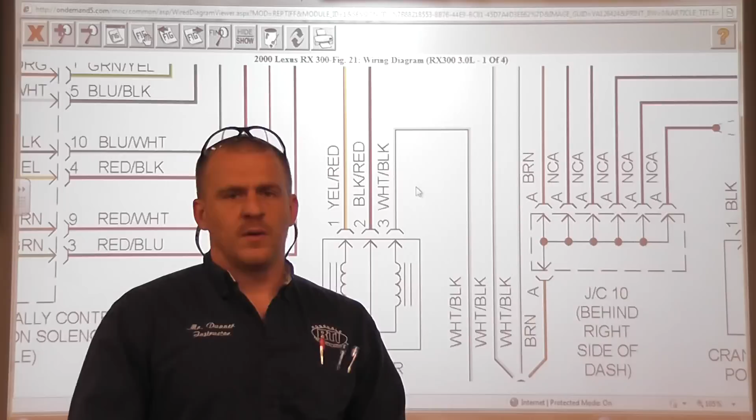Okay, this is part 2 of our 2000 Lexus RX 300. This vehicle comes in and doesn't start, with all the symptoms of low compression. Long story short, we have an idle air control problem, so we're going to address the idle air control motor on this vehicle.

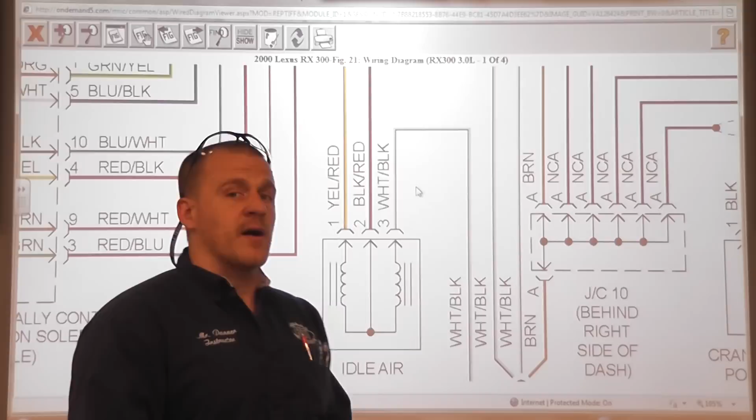First place we're starting is a wiring diagram, to see what kind of idle air control motor we have. This is a 3-pin idle air control, as it shows right here. There's my idle control valve, top rear of the engine, 3-pin, and what we have is this white-black wire that goes right to a ground splice, so this is constantly grounded.

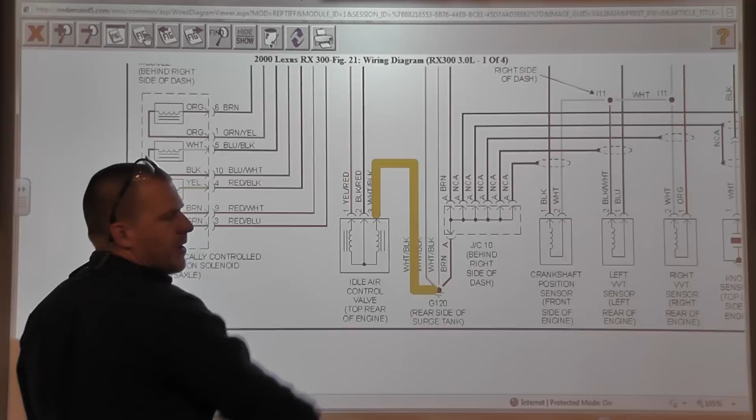I've already tracked this black with red right here. That is a 12-volt feed from the EFI main relay. So we have a constant 12 volts on this wire, a constant ground on this wire, and if you look at this wiring diagram, that means that this coil right here is constantly energized.

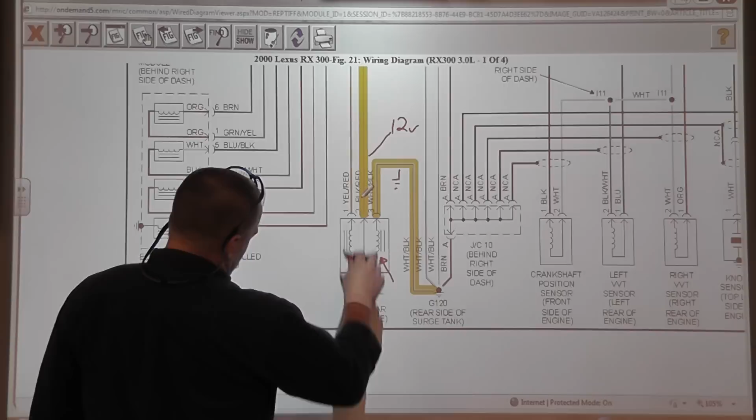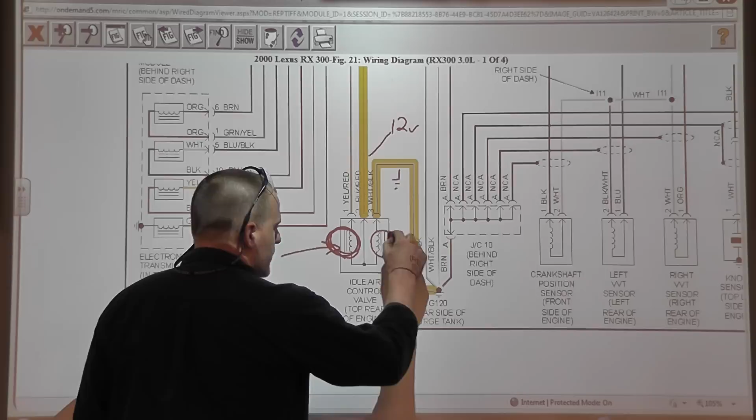The other coil, this yellow-red wire, goes to the computer and it is a pulse width modulated ground on that yellow with red wire. It's a pulse ground. So the way this valve works is we strengthen and weaken this magnetic field. This one stays the same all the time, and that's going to cause this type of valve, which has a butterfly inside of it, to rotate left or right based on these two magnetic fields.

This is the way this one's working. Not all Toyotas are designed like this. Some of them actually had this one also pulse width modulated, so we would control this one and this one, but in this case it's not like that. Still, very similar in construction.

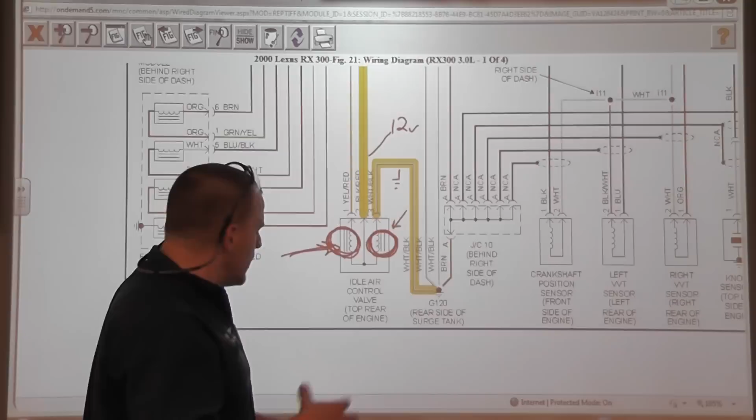Again, inside of it we're going to find this plate, and the way it moves either this way or this way is going to open up that air passage, based on the strength and weakness of that magnetic field. So what we want to do when we do our checks with this - and it's really important that you understand a little bit of theory behind this -

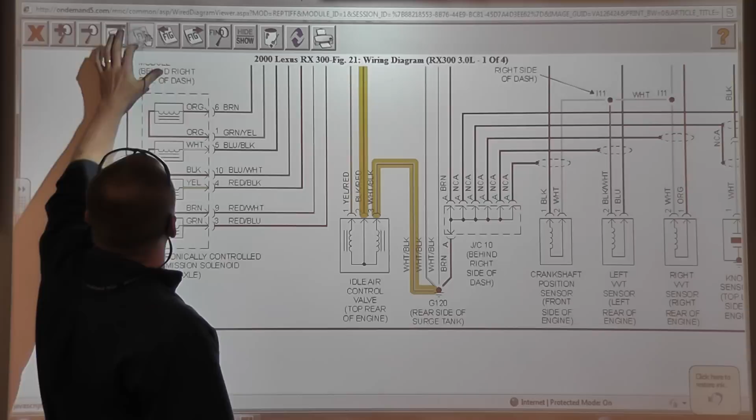is we want to do our voltage checks. And of course you can't do voltage checks on something unless you know what the voltage should be. What do we want to see on pin 2? We want to see battery voltage, between 12 and 14 volts with the engine running. We're going to do this stuff with the engine running. So we want battery voltage on this black-red wire.

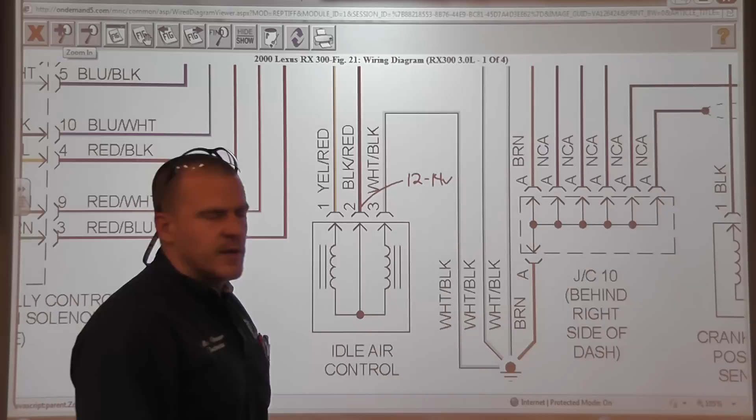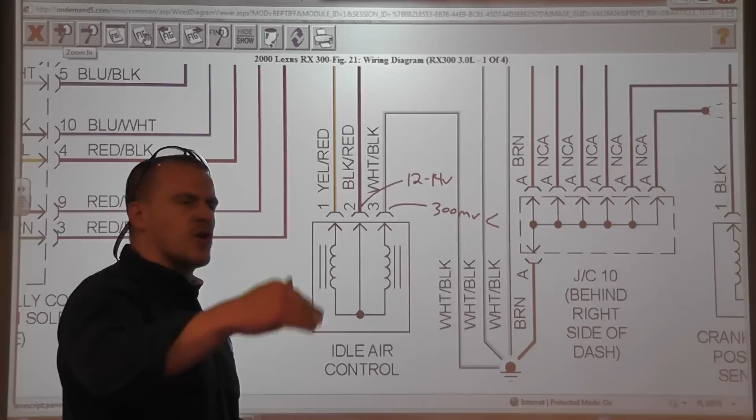And then on the white-black wire, I'm not sure exactly what would be tolerable here, but a few hundred millivolts at most on this ground - maybe 300 millivolts or less, I'd be happy with that. The reason I'm giving a little bit higher ground voltage is a little bit more current flow on this circuit, so I'm okay with that.

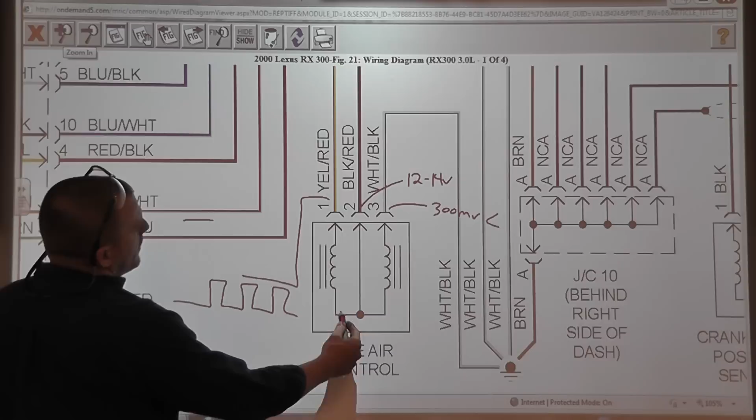Low voltage on the white-black, 12 to 14 volts battery voltage on the black-red, and then what we want to see on this yellow-red is some type of square wave, pulse width on-off signal. I'm not sure exactly right now, I've never done one on this car. It might have some spikes to it.

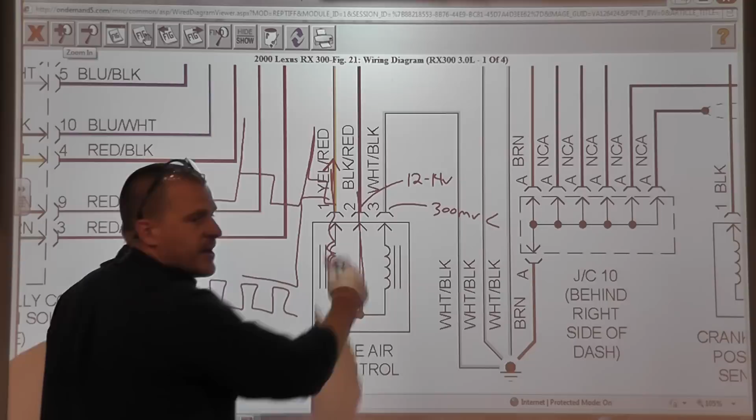Those spikes would be when it's on - the voltage is low because it's ground side switched. When it's off, the voltage is going to be high. You're going to have voltage come through here, through the coil, and the voltage will be high coming out of this yellow-red wire unless the computer's grounding it. So maybe voltage low, and then you might get a spike afterward because of the design being ground side switched. So we might actually have a square wave with spikes on it, and that could be normal too. Those spikes would simply be the collapse of the magnetic field when it's turned off. Again, I don't know exactly what this one's going to look like.

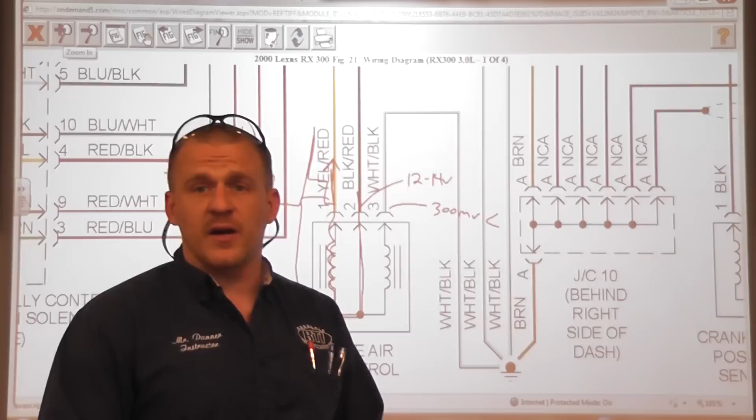That's the test we're going to do. We need to confirm that the computer is able to control this valve before we pull the valve off and say that it's mechanically stuck, which is the common problem. So that's what we're going to do now. We're going to go to the scope and pull up all 3 channels at the same time - we have that luxury. Maybe we'll do it like that. Put it back up on the screen. Okay, go ahead, pause.

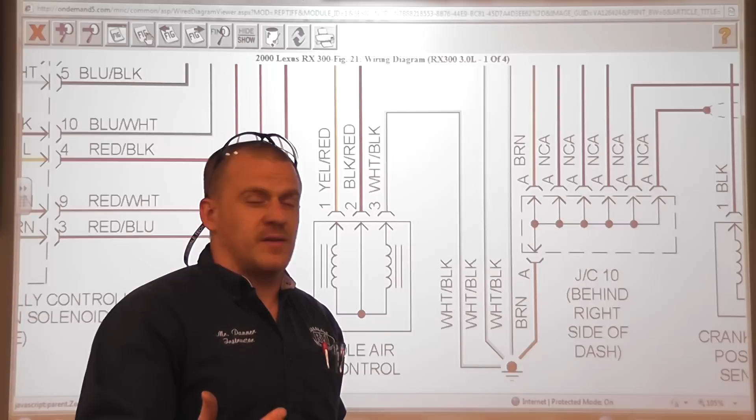Okay, I want to warn you guys of one thing. I said we're going to look at all 3 at the same time. This really is a safety concern with the engine computer doing this.

I'm using insulated T-pins, and actually I got these. Where's that kit? Can I see that? These are from Pico. These are electronic acupuncture probes, and they're insulated. So it's basically a T-pin, but they're insulated.

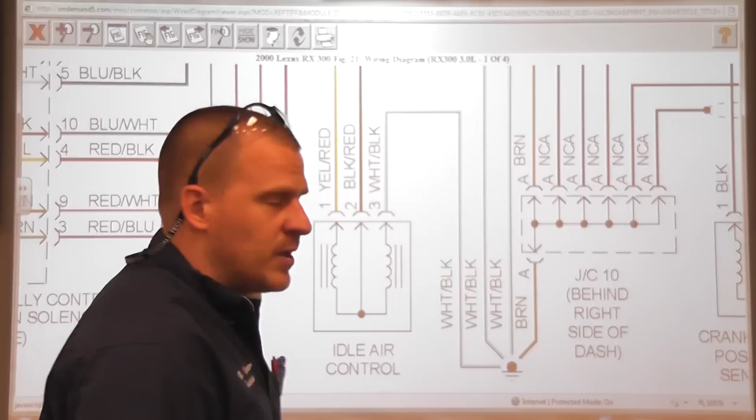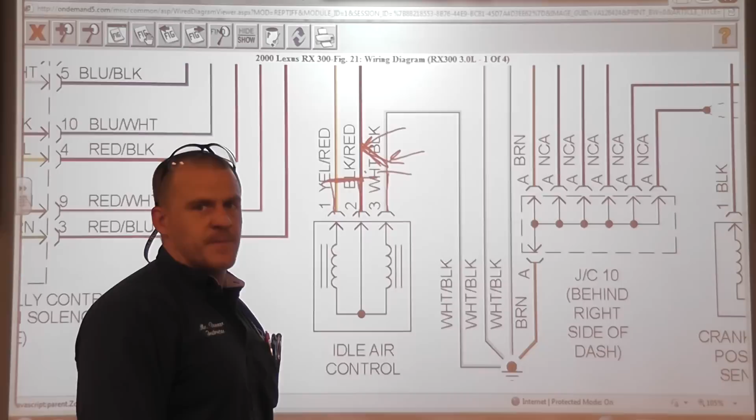The reason I'm using these is because we're going to do all 3 channels. If I use 3 T-pins and these things touch each other, remember that this is battery positive, this is a ground. If these 2 touch each other, I'm going to blow the fuse. If these 2 touch each other, my battery positive and my ground side switch computer driver, I'm going to cook the computer.

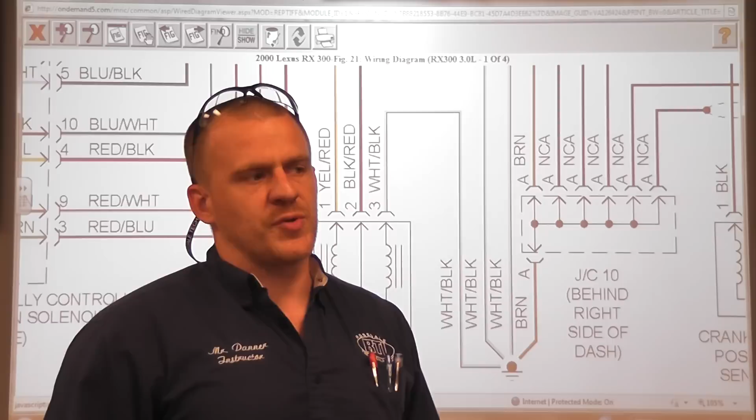So we need to be extra careful about what we're doing with T-pins. I know that I stress to never double T-pin a solenoid, which is what we're about to do. I'm doing it because I want them all in one picture so I can show you how the thing operates. I'm not suggesting in the field that you do all 3 at the same time. Do them one at a time. You only need a single channel. Check your power, check your ground, check your control signal. Don't do them all at once.

Okay, pause that for me.

All right, the tool we're using for this test is the Picoscope 4000 series. And I'll give you a shot under the hood, show you where our connections are at the idle air control motor.

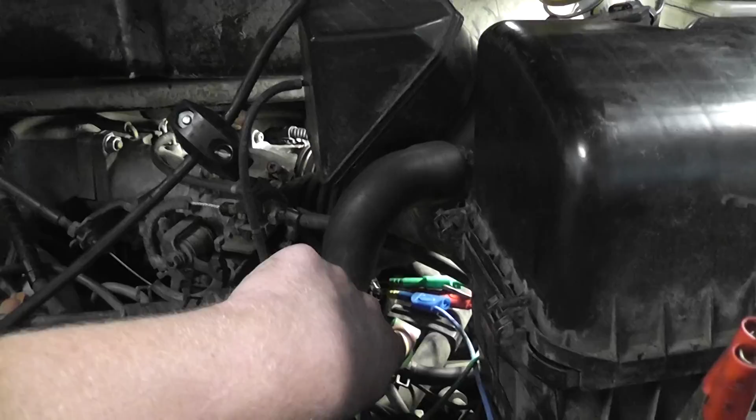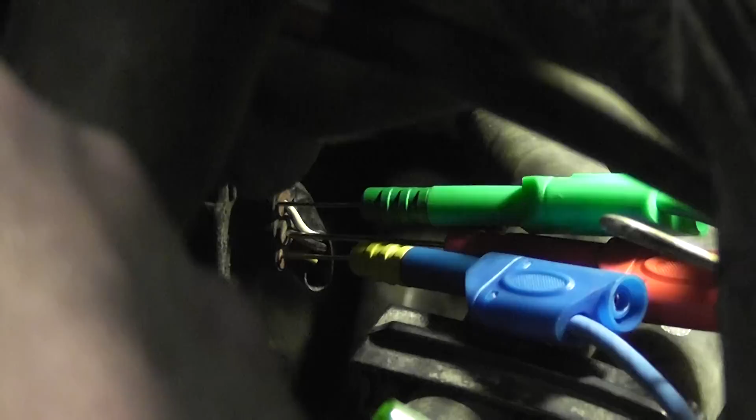Okay, I'm under the hood. Very difficult to get to this idle air control valve. It's underneath the throttle body. You see my leads are connected to that connector, 3-pin connector under the throttle body, 1 to each terminal. Again, I'm using insulated type T-pins. You don't want these touching each other.

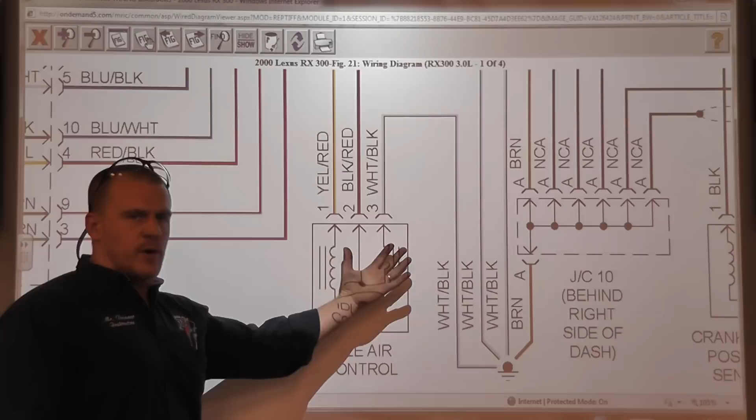And we'll go back up to the computer screen and I'll explain to you what's going on with these 3 readings. Okay, again where we are: 3-pin idle air control, common power, common ground, or constant power, constant ground, pulsed ground.

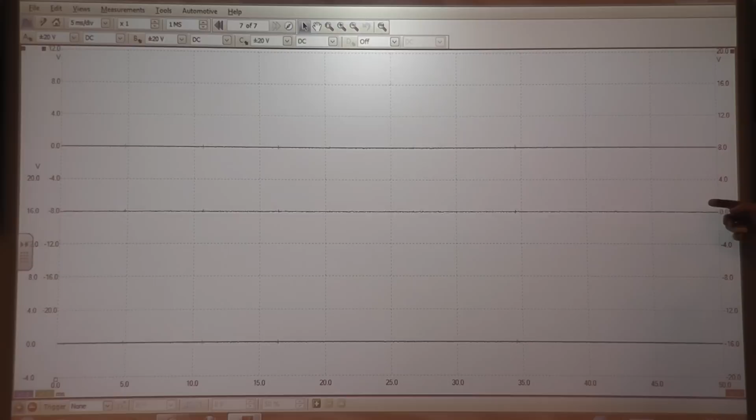So my 3 connections: my green trace is my ground, see I'm at 0 volts. My red trace is my battery positive, my power feed, it's at 0, the key is off right now. And my blue trace is my computer pulsed ground. It is also at 0. I have these set on a 20-volt scale for each.

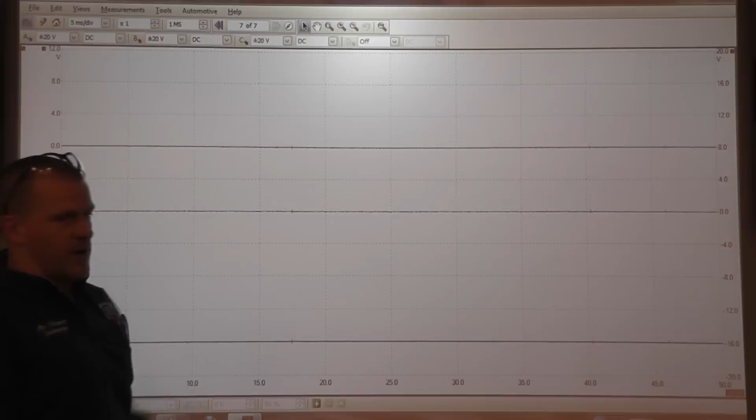The time base will adjust accordingly, depends on what the picture looks like. Turn the key on for me.

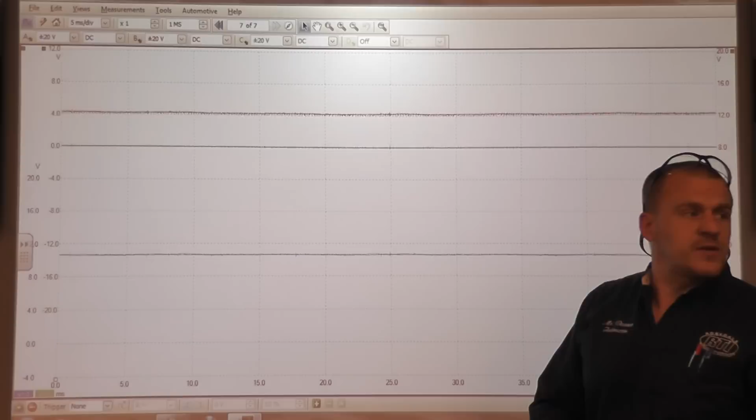Alright, so you see initial key on. I do have a battery charger on this, so some of the up-down oscillations that we have here are a little bit of interference from this battery charger. You see we have battery voltage, that's power from the EFI main relay. You see my ground is maintaining near 0 volts, and my computer controlled wire for this idle air control is near battery voltage, not quite.

Okay, start the car. I'm going to need you to hold your foot on the gas pedal a little bit to keep it running.

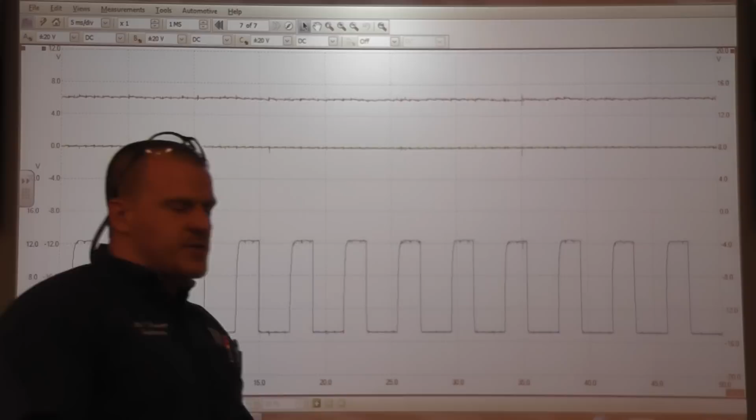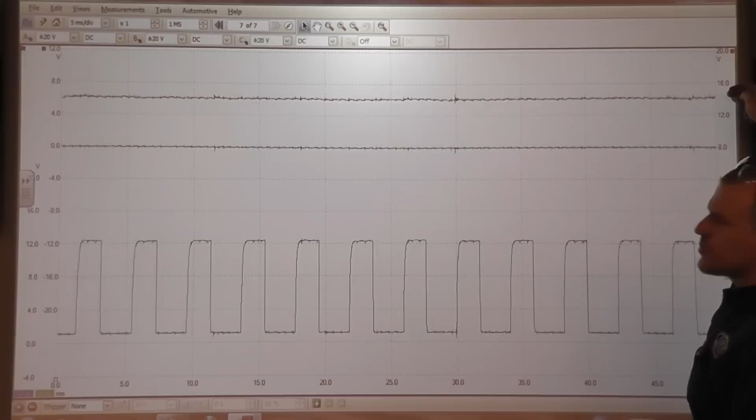And truthfully, just by this waveform, we have everything that we need for this idle air control valve to be functioning. We have our pulse ground, as noted by this picture. And this in itself tells us that the computer is able to control this idle air control motor. Our constant battery voltage up here, which we showed on the diagram, is what it should look like. And our constant ground, our ground looks good, our feed looks good, our pulse control looks good. This is all going to point to we have a stuck idle air control motor.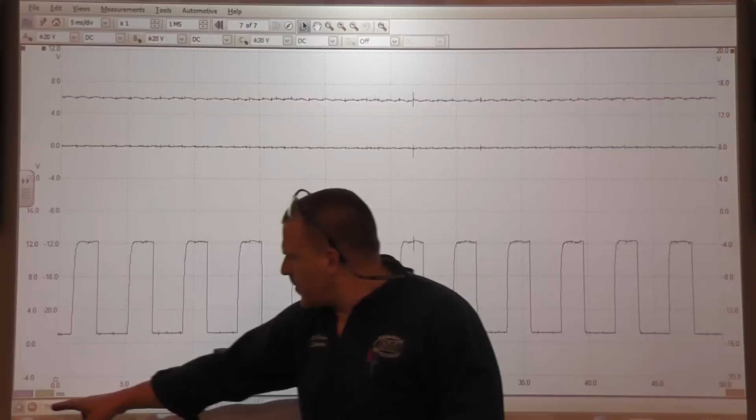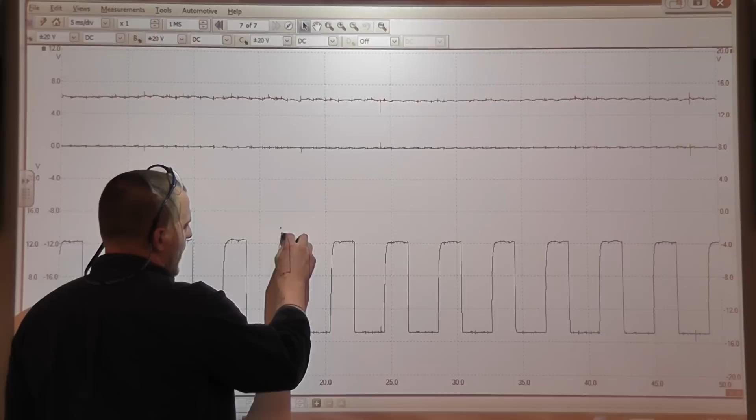Ideally, what should happen, this picture right here, let me pause this. Go ahead and let that stall. What should happen in this picture is the pulse width or the duty cycle is going to change. When the computer wants different idle speeds, what you will see is this on time and this off time is going to change. This is my off time in this picture because our voltage is high.

This is ground side switched, so my on section is down here. If the computer wants this magnetic field, that second coil, to be a stronger magnet, it would look something like this.

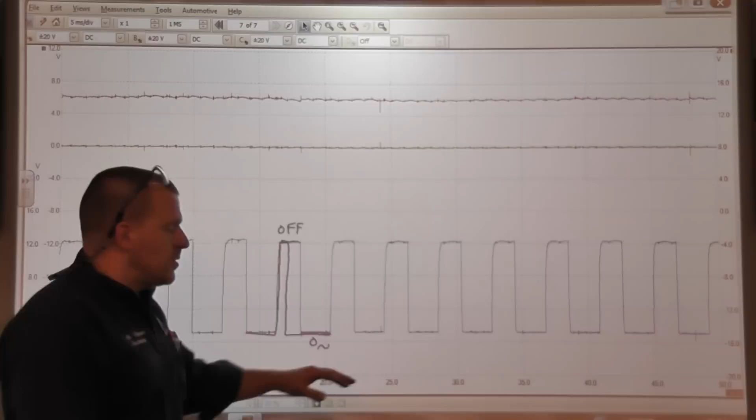It would be a shorter off time and a longer on time. If the computer wants this magnetic field to be weaker, the off time is going to increase and the on time is going to decrease. That's how it's controlling the magnetic field on that separate coil, with a variable on-off time, which weakens or strengthens the magnetic field.

Now what we don't know is which way it should be. We don't know if this second coil needs to be stronger to close the idle air control, or stronger to open it, and it really doesn't matter for what we're doing right now. Our focus is, can the computer control this valve?

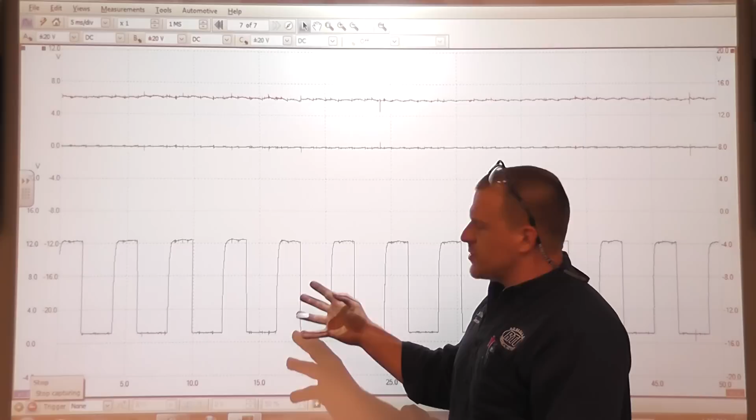And the answer is yes. Is the valve functioning like it should be? The answer is no. This vehicle continues to stall, and there's no idle control whatsoever.

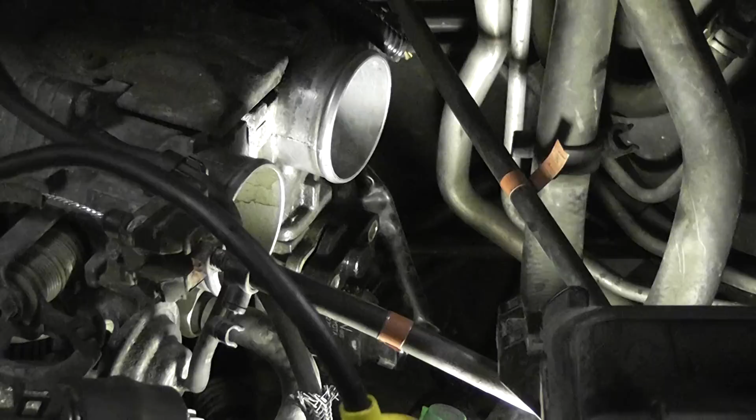So our next step in this process, we're going to pull this motor, and I'm going to show you how to hopefully clean this thing, and if we can't clean it, we're going to have to replace it. Procedure tells us to take this throttle body off to get to it.

What we've done is, the electrical part we've already unbolted, and this is the electrical part to it. Our focus is on the mechanical part, which is this piece in here. Unfortunately on this one, I can't pull it all the way off right now to show you what the butterfly valve looks like, but it does have one.

Instead of unbolting the whole throttle body, we're going to try to just work this valve back and forth and try to knock all the carbon deposits off of it. If you reach down and grab this thing, it's really, really tight. Actually I can turn it, but just not very easily. So all I'm really going to do is try to free this up by working it back and forth.

If we get this thing moving very freely, then what we can do—there's an O-ring there, don't want to lose that O-ring. Move this thing back and forth. It gets us to the point where it takes very little pressure to turn it. We should be able to bolt this back up and be good to go. In fact, I'm pretty happy already with how free this is.

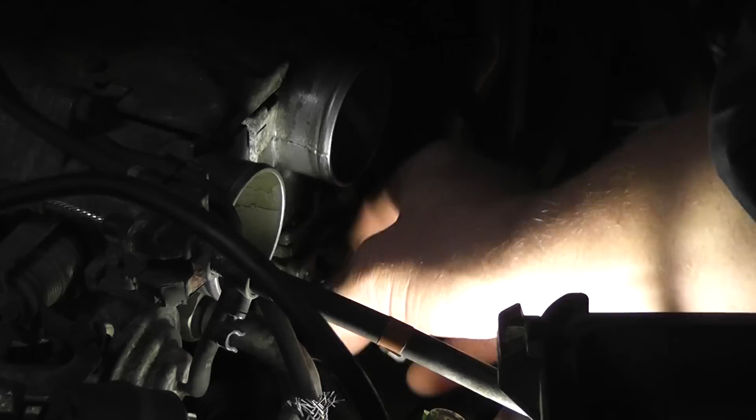What happens with these is, this is a steel shaft and it's an aluminum housing, and the aluminum housing will oxidize. What I'm doing basically right now is I'm just knocking all that oxidation off the inside of this aluminum housing. That's pretty free now.

What you can do on these, if they're real bad, is take these things all the way off. There's a cover on the back side that limits how far this will travel, and you can take that cover off, but you want to mark very closely where this shaft sits, because you don't want to put it on backwards. But you can take it off, and you can actually spin this thing 360 degrees and really knock all the stuff off of it.

But it's actually pretty good right now. I think this particular one is magnetic too—that is, there's a permanent magnet. So we really have three magnets if you think about it on this: there's two electromagnets and one permanent magnet. The permanent magnet is on this shaft, right where my finger is.

Is that still in the shot? You still see what I'm doing?

Okay, that's pretty clean now. I think we can put this thing back together, see what happens. So all I did was work it—we didn't use really any penetrating oil or anything like that, just working it back and forth. That's pretty clean, pretty free. Let's bolt it back up, see what happens.

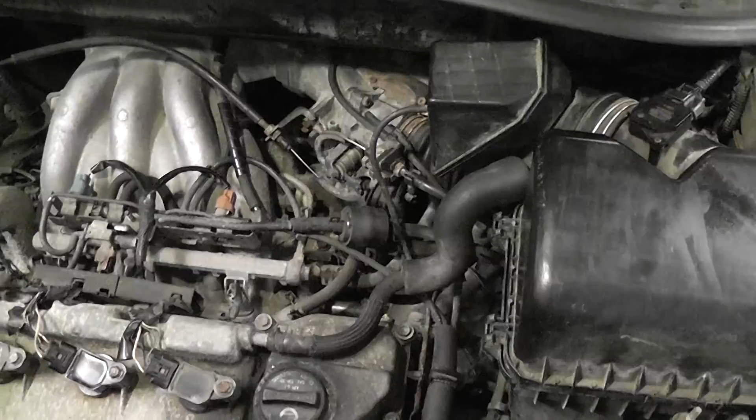All right, so we bolted this back together. That was obviously a lot easier than taking the throttle body off. We're pretty sure that this thing's going to start now—go ahead and try it.

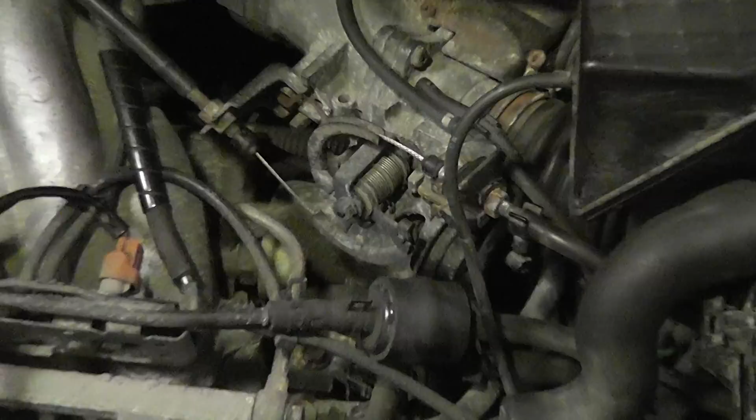You see we were not on the throttle. Let's zoom in on the throttle here. Go ahead, snap the throttle once. Snap it. There you go. All right, you weren't even in the car, were you? Shut it back off.

Start it back up again. We should hear a flare up. That is a fix. Shut it back off.

I want to mention one more thing to you guys, and then we can show the waveform of the idle air control after. It's really not necessary. I don't know, maybe I won't show it.

One of the things you want to listen for on an idle control is, I call this in my book an IAC functional test. Every time you start the car, you should hear an idle flare up. Listen closely: the RPM should rise a little bit, maybe 1300 RPM, and then fall back down to a normal idle speed. Every car will be different as far as how much it's going to rise, but listen for that flare up. Go ahead, start it.

Shut it off. One more time, listen to it again. You saw both times we started this car, it had a flare up, you could hear it, and it's starting to fall back down. That's telling you the idle air control motor is functional in both directions. Very valuable test for a stuck, closed idle air control valve.

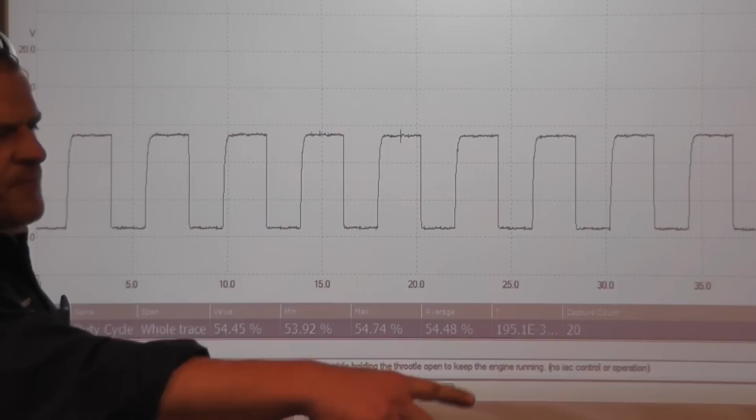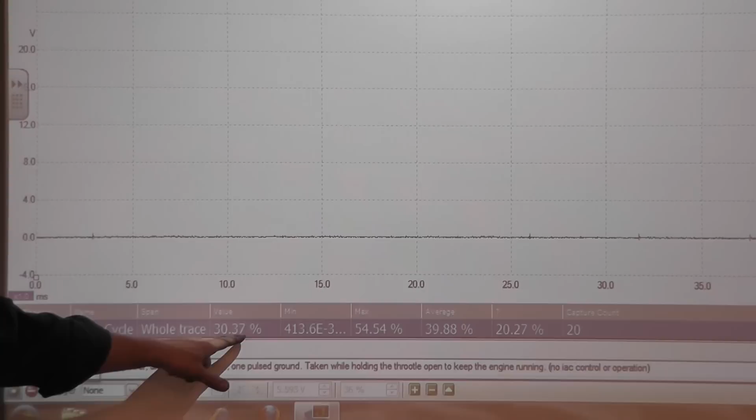What we want to do is watch this waveform. We'll watch it during the flare-up, and pay attention to this duty cycle number I threw up here. Unfortunately this is measuring the high portion, not the low portion, so the on time is going to be opposite here. But bear with me. Go ahead, start the car.

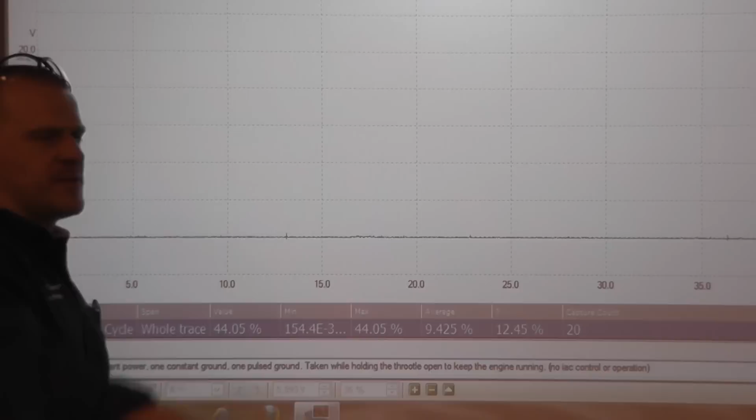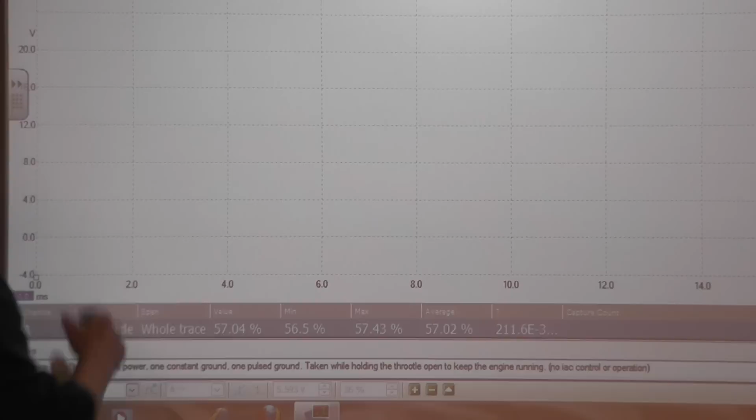See this duty cycle number changing. We'll let this stabilize, we'll get a number. The other thing that will help is to set up the trigger. Actually, let's zoom in first, look at our time base at a lower level. Now this is walking on the screen. Maybe we'll look at it right there, it'll be even more clear. We'll set a trigger up and that'll keep it on the screen for us. The only problem with being down this low is it's having a hard time calculating that duty cycle. I'm gonna have to leave it on that one.

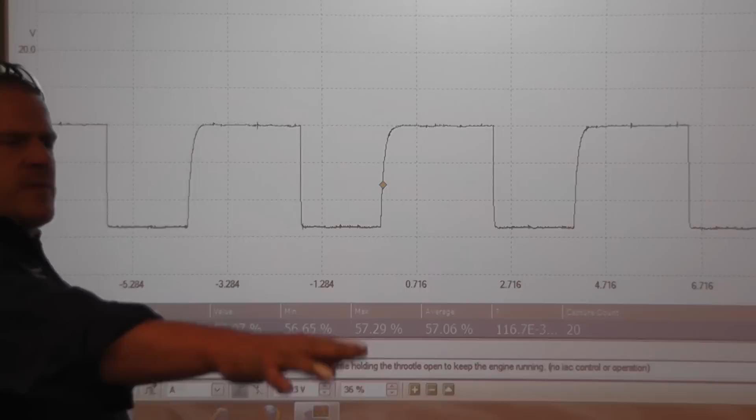All right, hold your RPM at like 2 grand for a minute, we'll warm this up and look at these numbers. All right, let it idle.

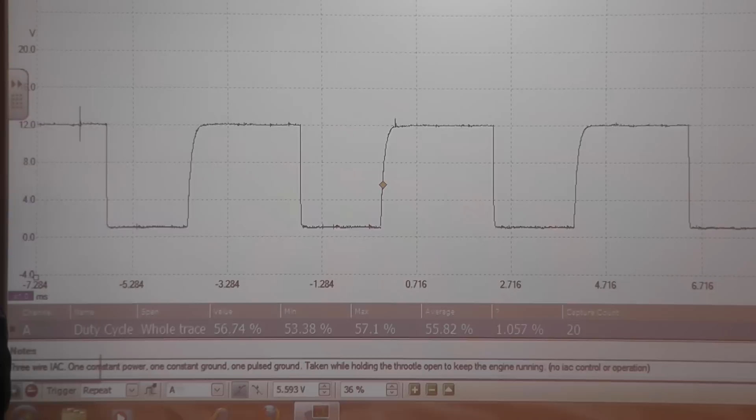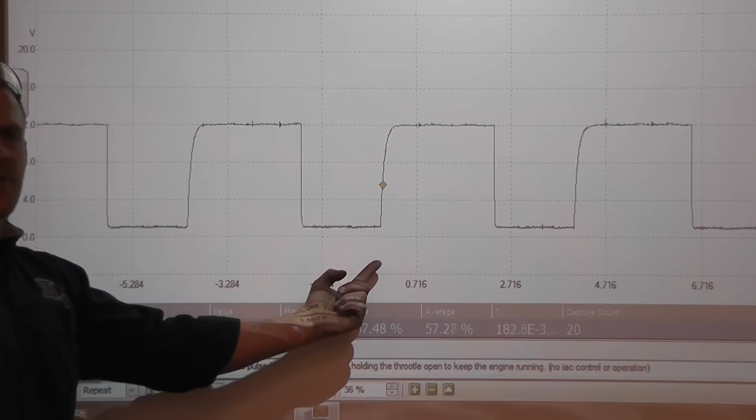Okay, the number we're looking at right here, guys, this 57%. This is 57% off up here, it's on down here. This particular scope is measuring the high portion in this channel, so 57% we are off. Remember, it's ground side switched, so do your math. What's our math? 43% we're on. So we have an on time right now.

This engine's not fully warm yet. Was I off a little bit? Okay, 43% is our on time. No loads, no accessories on, and by the way, we never cleaned the throttle plates on this, which we really need to do still. Because if this had clean throttle plates, we would have never had this initial complaint, or the direction we went with crazy stuff with vacuum. Anyway...

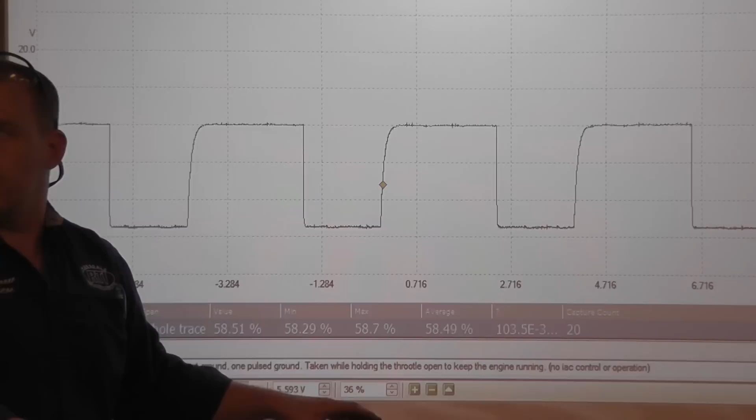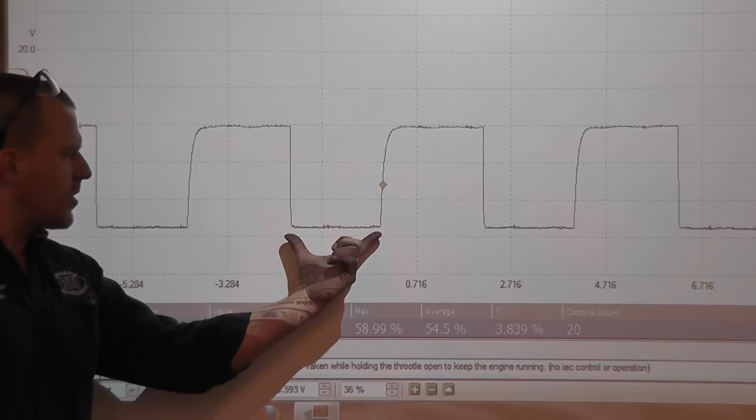I like to see usually about 30% when it comes to idle air controls, that's pretty much a good ballpark. So right away, this one's high, just to compensate for no loads. Watch what happens to the on time down here as you increase load. Go in gear, high beams, rear window defogger, headlights on, blower on high, and you're going to see this number start to increase. You see this number's dropping, and this number's going to increase.

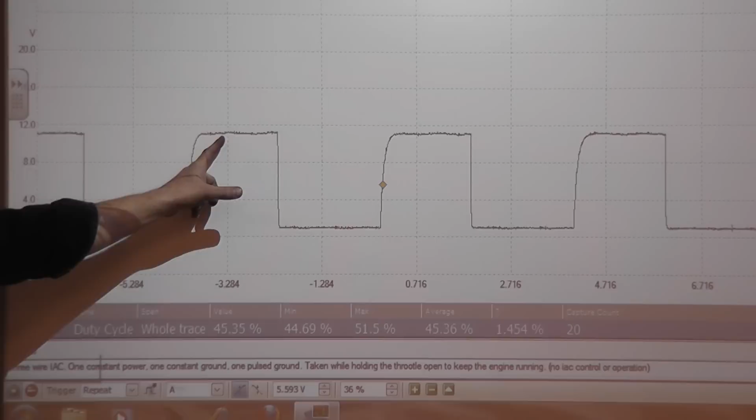Down to 44% up top. That means our on time has increased if our off time has decreased. And this is how it actually works. Here's what we know now: a stronger magnetic field on this computer controlled coil means it opens more, which is what we now know by looking at this. So we want to do one more thing.

I know I'm killing this, but it is what it is. Turn all your accessories off, let's get a baseline number.

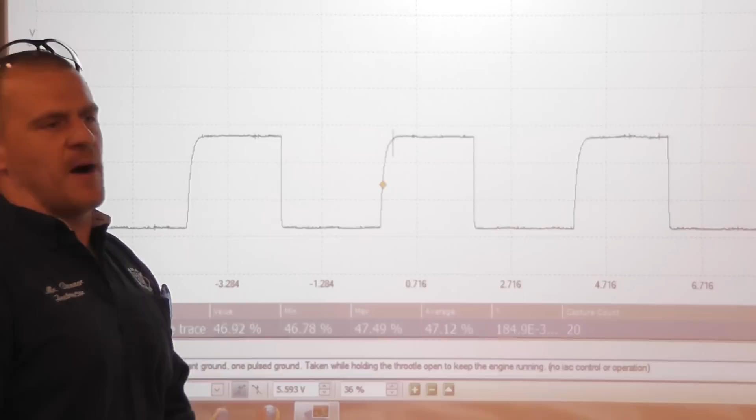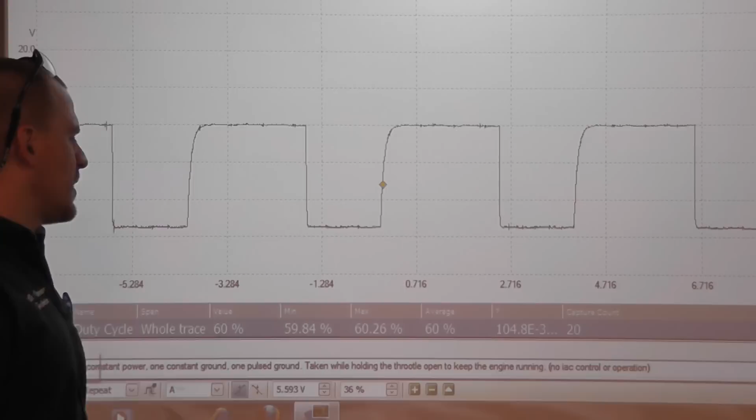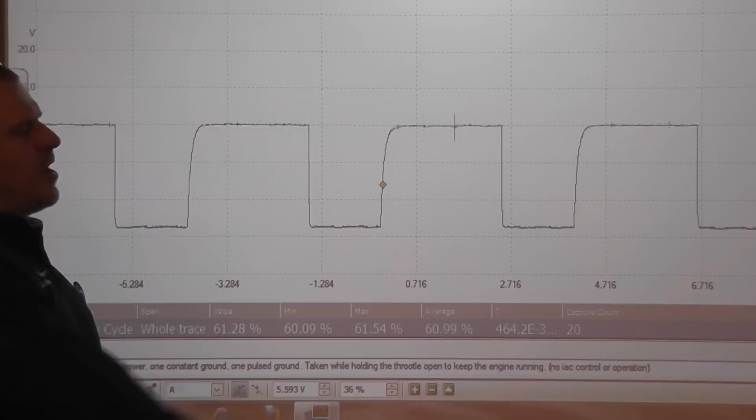Where were we? We were about 43%. Is that where that number was with all the accessories on? Let's see where this sits with no accessories. We're going to clean this throttle plate, see if we can get this number to drop even more. That's better, we're about 40%. I'd like to see that a little bit lower, but this is how it should operate. This is an idle air controlled, pulse width modulated, or duty cycle controlled valve, very similar to every other type of solenoid type idle air control valve.

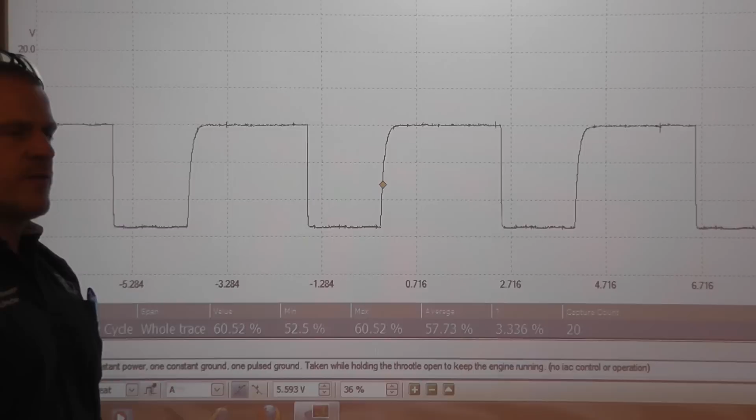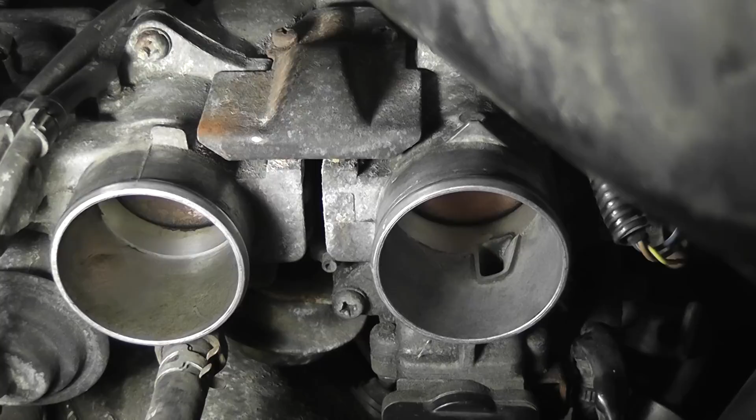All right, pause that. Okay, throttle body. Looks clean on the front side, but where we care about it is right where the plates close. Can you open the throttle plates for me? You see there is a black ring where these throttle plates close. It's very bad. Go ahead and close it again. Open it just a little bit. Right in there where that black ring is, we need to get rid of all that stuff.

We're going to use a scrub brush and some carb clean. I'll show you the after picture. Okay, here's the after shot. Obviously I'm not going to have carb clean next to my camera, so sorry we didn't show you that. Go ahead and open the throttle up slowly so we can see how clean the edges are. Good, keep opening. You see how nice and clean the edges are where that plate was closing? That's the stuff you have to get off. Spraying it's not enough, you got to scrub it.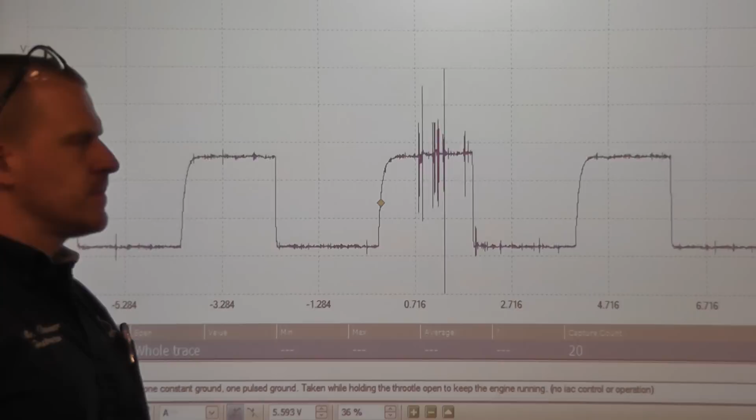Want to look at our duty cycle percentage with this clean now, and I'll show you what it should look like. All right, this is after cleaning the throttle plate. Go ahead and start it. Okay, you might have to give a little bit of gas, we just got to flood it out from some carb clean. Hold your RPM up a little bit, hold it at like 2 grand for a second, we'll blow all that stuff out.

Okay, let it idle. All right, the number we want to look at is this number right here. So we're at 55%, still let this stabilize a little bit. That's not too much different from where we were, is it? That's about the same, we were about 40%. I wanted to be around 30% down here.

Hold your RPM back up, get this warmed up. Okay, let it idle. 61%. Where were we before? 55. Still like to see this number around 30%. I'm not sure how much improvement we got on that.

Let's put all the accessory loads on now and look at it like that: high beams, rear window defogger, blower on high, AC on. We in gear too? Were we in gear before when we did the shot before? Put it back in gear.

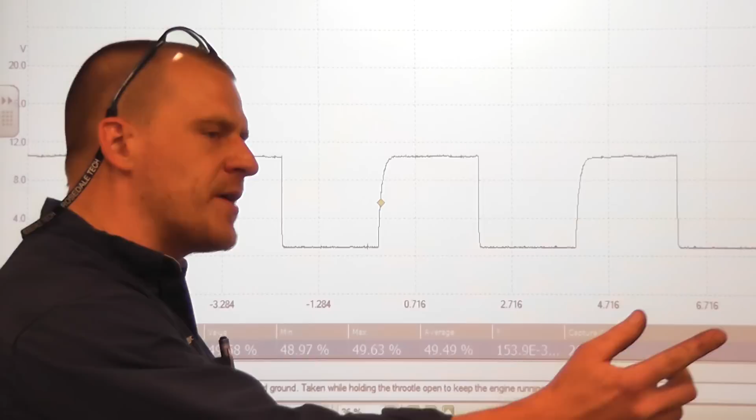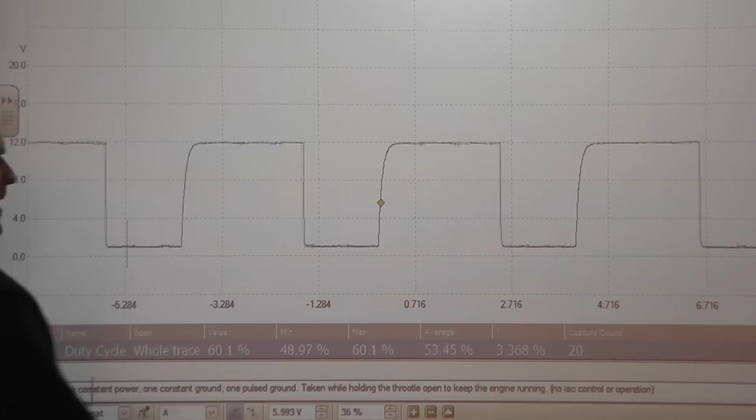And that has to do with the clean throttle plate. Turn all the accessories off, let's let it idle one more time, get one last number over here. So we're about 50% roughly with all the accessories on. That was the on time down here. Remember, this number is going to be opposite than what we're looking at. So all accessories off, we're sitting around 39, 38% roughly. I like that better than where we were before. That was definitely an improvement. Of course, the overall problem with this car was a sticking idle air control valve.